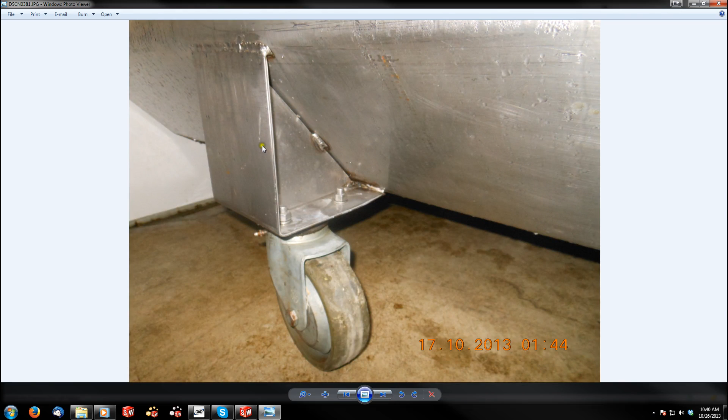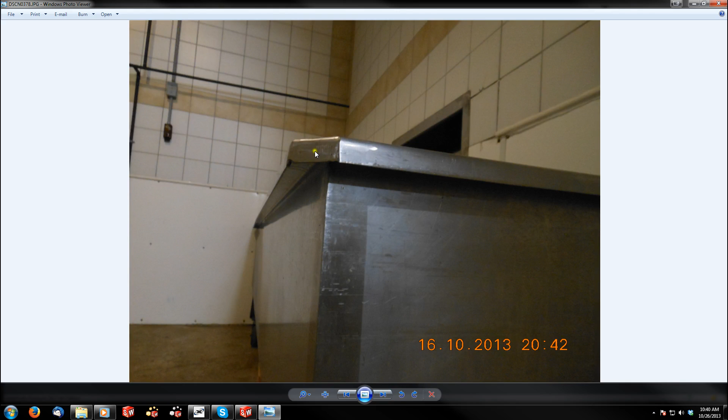This is the chest here. Here's the caster plate. This is specifically what he's looking at me modeling. I'm going to model the entire thing, save for the external details that aren't really necessary to what he's looking for. We'll get to these and I'll show you how to do these. You can do these several different ways, and it all really depends on how the part is going to be manufactured.

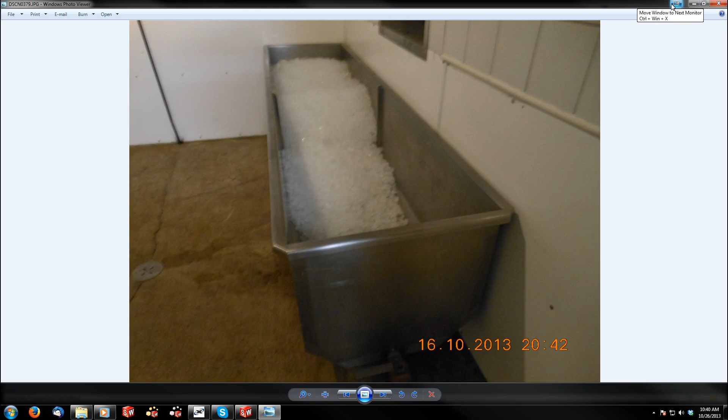I'm going to do it the way I would think it would be manufactured. I could be wrong, and I'm sure Tim will let me know if that's the way it was done or wasn't done, but either way, just like in real life manufacturing, there's 100 different ways to do something in SolidWorks.

So let's start a new part. I also figured I'd model the entire chest too, just to do a brief sheet metal tutorial, since I don't think I've done any sheet metal yet.

Let's start out with I'm already underneath the sheet metal tab, if you can see. So if you don't have that yet, if you don't have a sheet metal tab, you can right click underneath where these tabs are and you can add it. So you can see mine's check marked. I don't have a few other things checked which I'm not using at the moment, so check that.

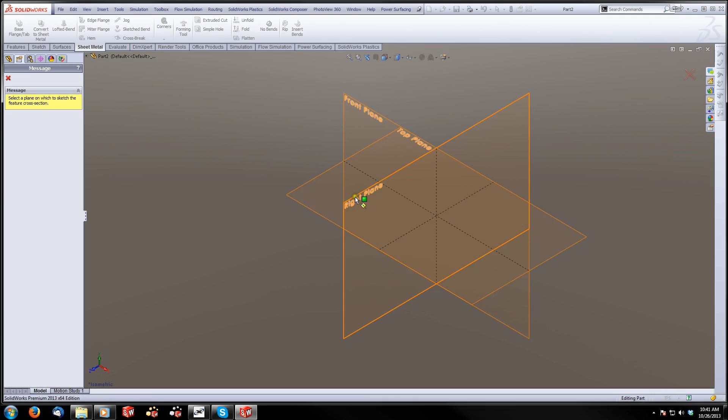Then we're going to go under base flange, which is essentially an extrusion, and I'm going to sketch on the right plane. And then go under your sketch tab and sketch just like you normally would.

I'm going to make this chest 2 feet by 2 feet. And then chamfer the edges. Make them 6 inches.

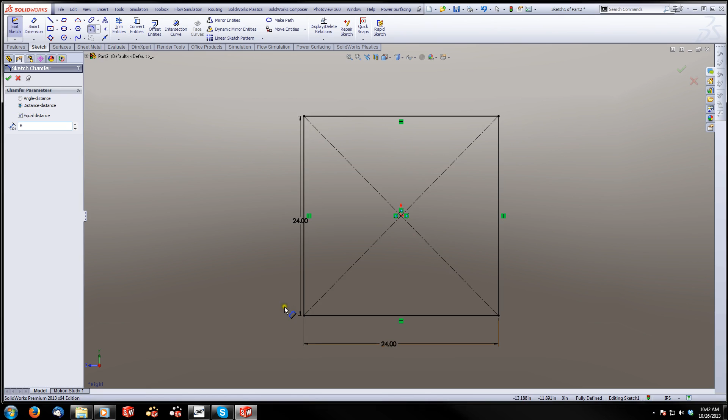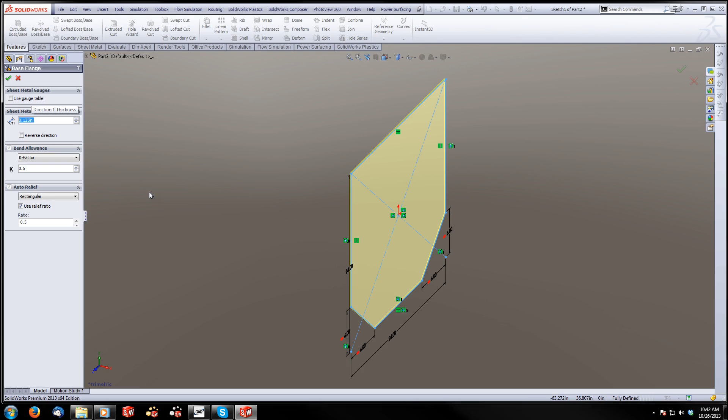Now, I'm just going to update my sketch, and you'll see that it automatically is looking for a wall thickness for the material, and I'm going to do an 1/8 inch. I think in the pictures it does look a little thinner than that, but I'm going to use my best judgment. My company that I work for makes quite a few sheet metal components, and 11 gauge or around 1/8 inch is typically what we use for items like this, so I'm going to go with that.

Now I'm going to create the top flange. Let me bring the pictures back over. This flange, the fold here, and the fold here, I'm going to create on this one part, so it'll be this lip.

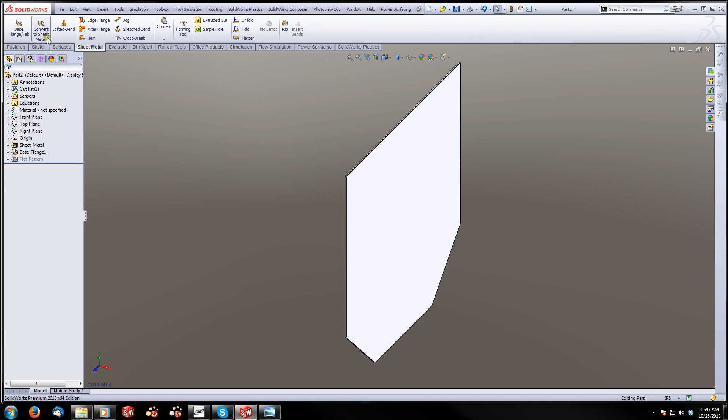And I'm going to do that by starting an edge flange and then just clicking the edge that I want to come off of. I want to go this way with it, and I can define the length of that, which I'll say 1.5 inches.

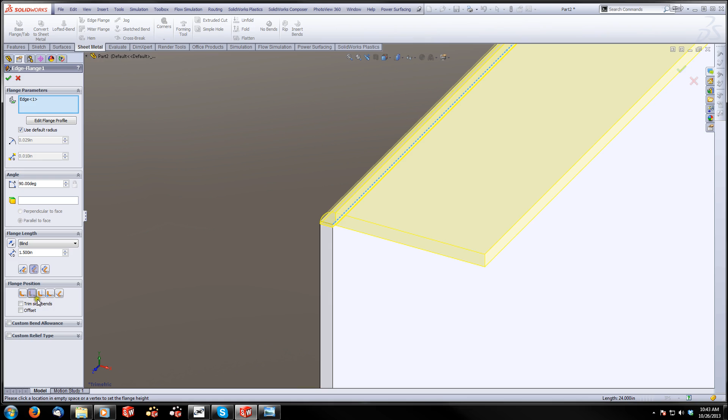And then if you look at the options down here, this is going to dictate how it's bent. So if I know that the top of this piece that I dimensioned is the absolute top of the component, I can tell it to bend below that line. And once I hit OK, it drops the bend down, and this top is maintained at 24 inches.

Now I'm going to do another edge flange on the bottom lip here, and bring that down, and we'll call that 1 inch. Alright, so that's 1 inch, and then I'm also going to keep the bend on the inside of the outer extent of the piece. Hit OK.

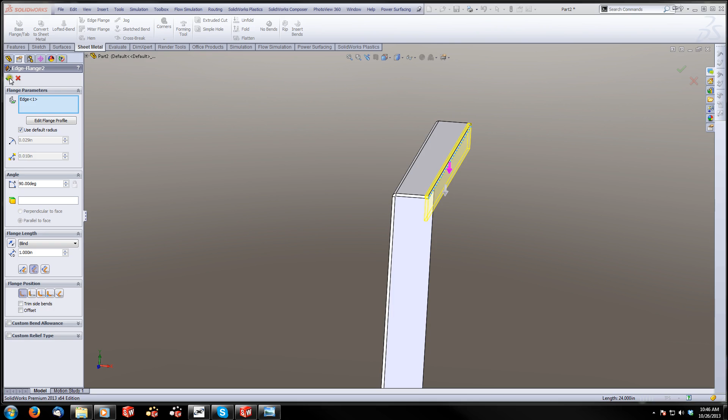And this is one wall of our ice chest. So I'm going to do a file, save, and that's my work folder for my stuff. I'll just make a new thing in here called tutorials.

And part 2 is fine. I was playing around earlier, that's why part 1 - yeah, we'll just make it part 1.

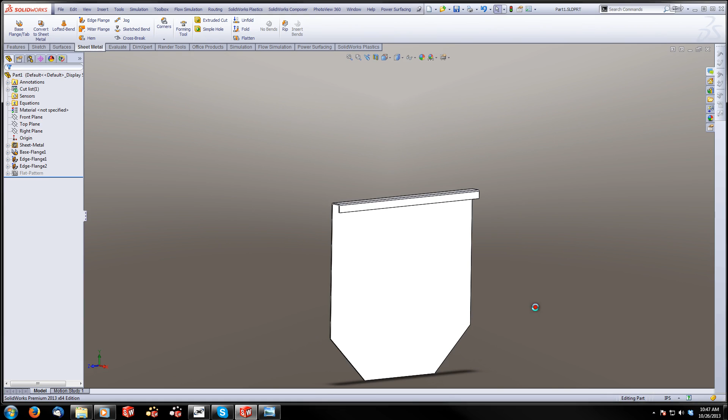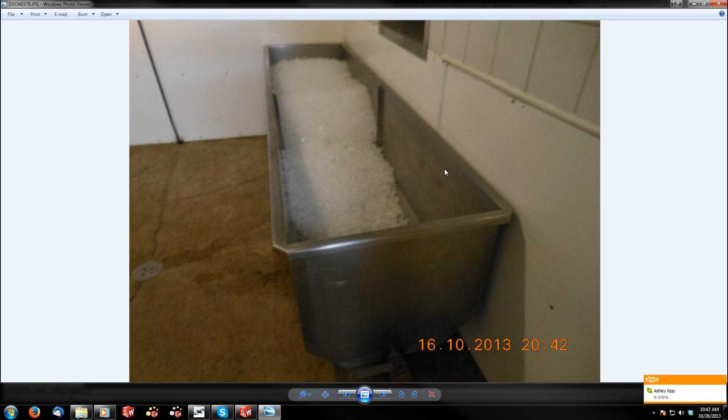Okay, next piece is the side walls here and here, and let's see if I got a better angle of this. Since the profile is more or less rectangular, and by that I mean the surface area, I'm going to draw this entire thing as one piece and then bend it.

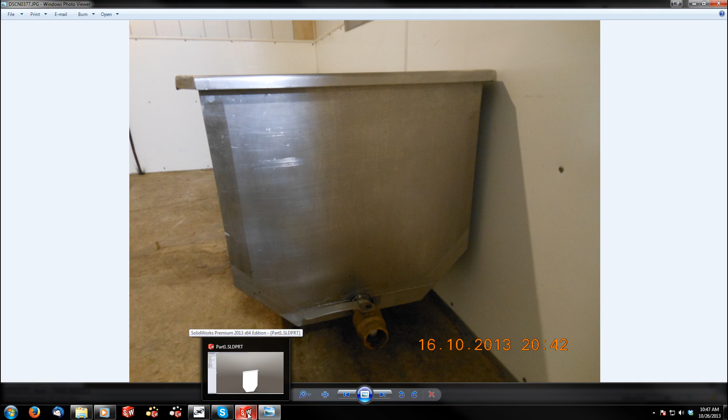So in order to do that, I'm going to start a new file, and I'm actually going to borrow the sketch from this part. Let's take the whole thing, copy it, and paste it into my new part.

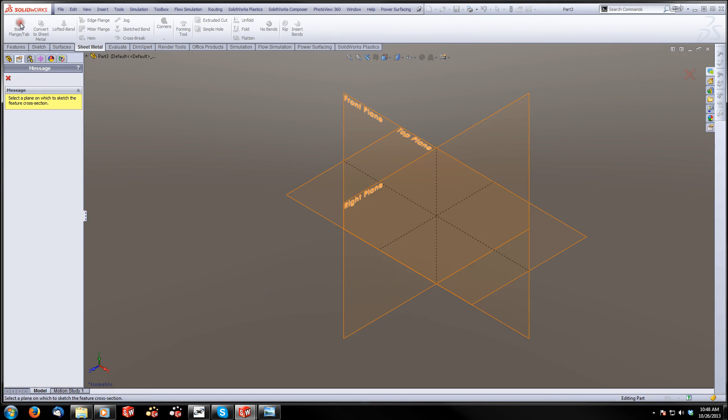Right side, paste it, move it onto the origin here, make it coincident. There we go, now it's fully defined.

This edge I don't need, so I'm going to turn that into construction geometry.

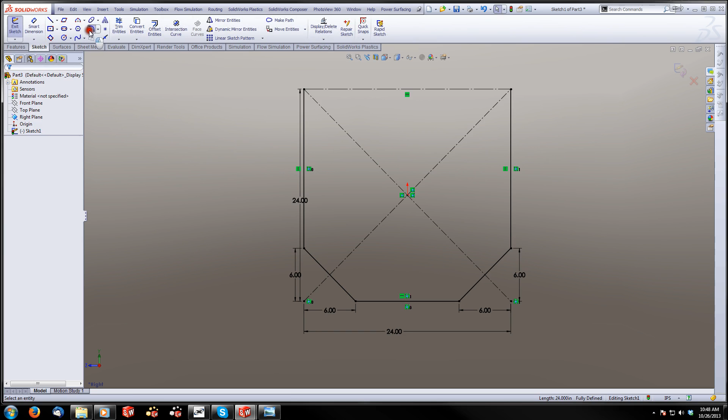I'm going to add some sketch fillets, which are going to be my bend radii. Make them a quarter inch. Might need to go a little bigger than that. Let's do three-eighths. And then hit OK.

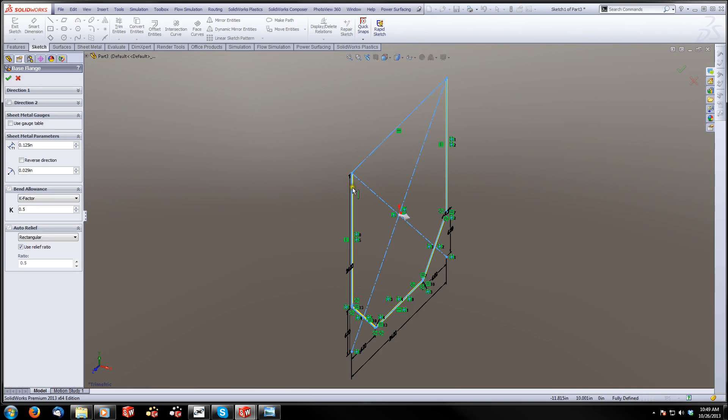Now it sees that entire sketch profile as a formed sheet metal part, so I have to define my wall thickness, which is good, and then I just want to make sure it's actually going in the correct direction, which it is.

So then at that point I tell it how far I want to go, which let's do 6 feet, and we'll make it mid-plane.

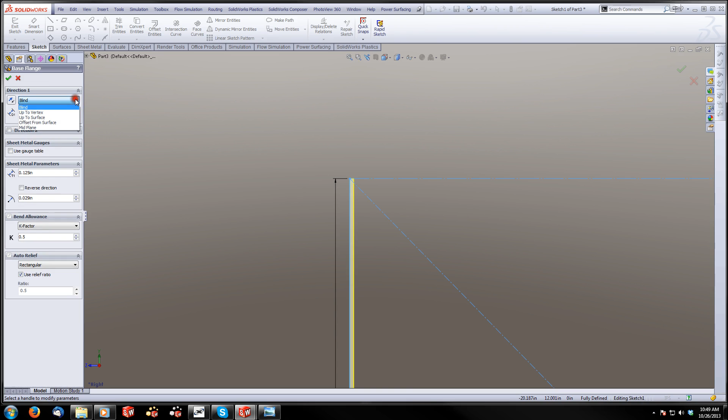Looks good. Now we're going to do our flanges again. For this I can actually click this edge flange, drag it out, click this edge flange, drag it out. It'll be the same size. We did 1.5 inches before, so we'll do 1.5 inches again.

Make sure it's below. Yep, good. Click OK.

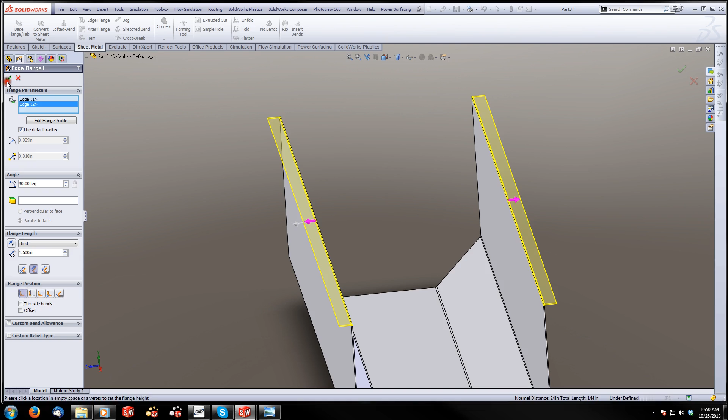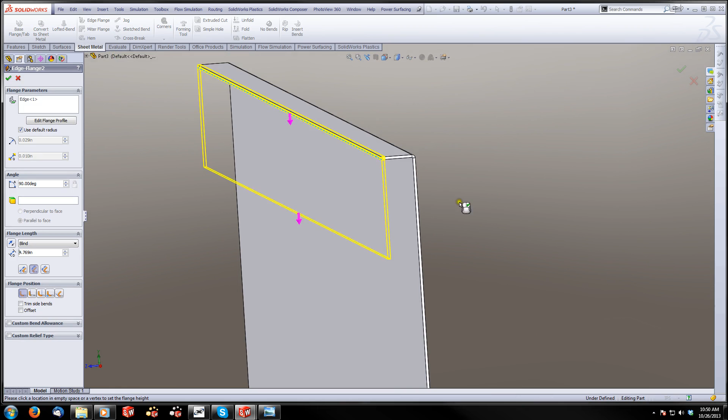Now I'm going to add another edge flange to this edge. My mouse is tweaking out. There we go. One inch, inside.

Okay, now we're going to save this.

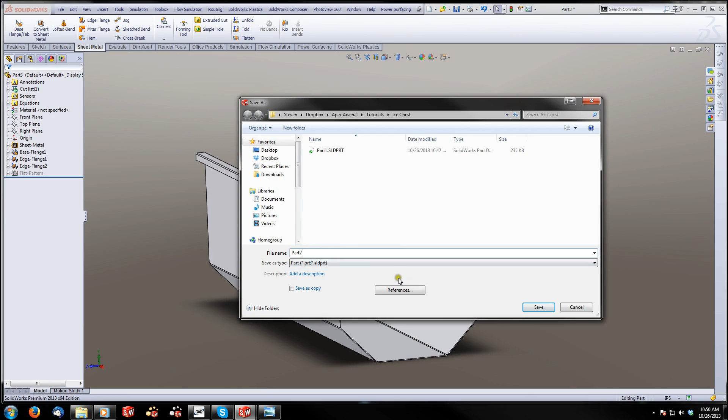Now we're going to make an assembly from this part. And I think I mentioned in my assembly video, if I want the origin of this part to be shared with the new assembly I'm making, once my assembly window is open and parts selected that I want to drag in, I'm just going to hit the check mark. And it automatically centers and locates this to share the assembly origin with the piece origin.

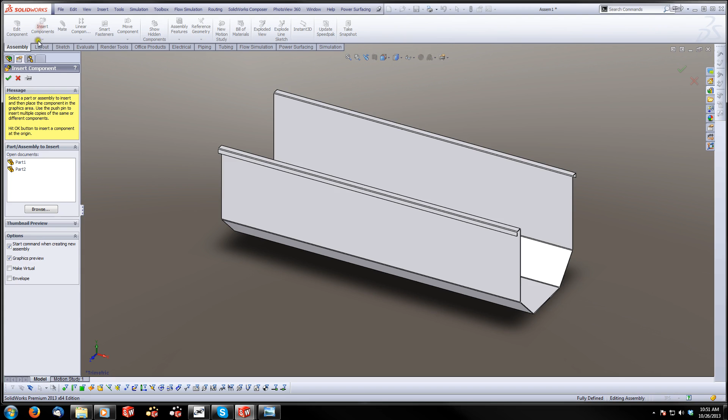Now I need 2 of part 1. So I'm going to place that one, hold control down, grab part 1 and drag off of it. That'll give me a second one. And then I can mate those up.

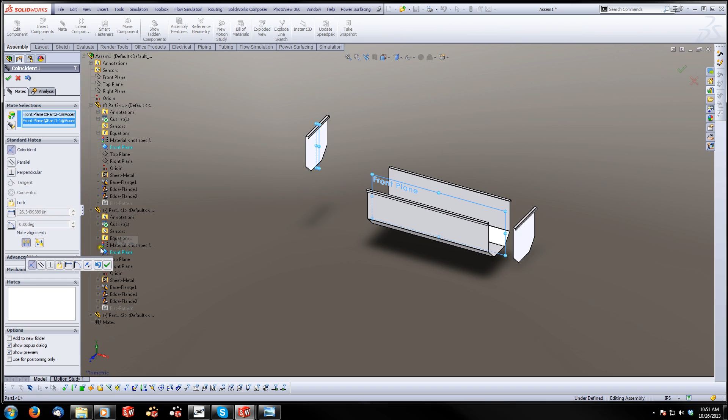And I can actually use my datum planes to mate those now, since I located this piece central to the origin. So I can do front plane, flip it. That's good. And then do this surface and the edge surface of this.

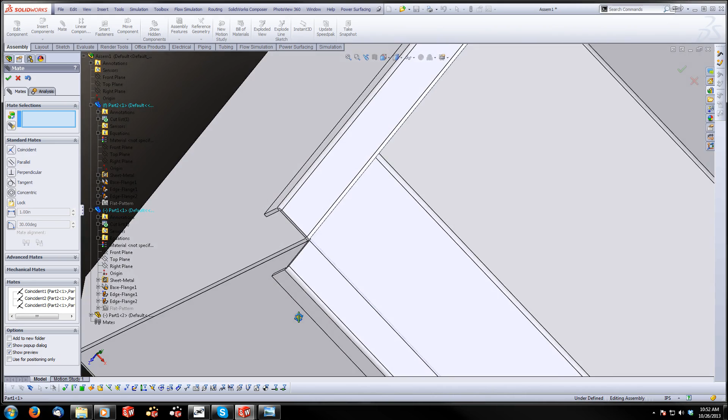Good. Top of this flange and top of this flange. So now those pieces are butted up, and realistically I should have gone oversized with this piece so that way you could get a good fillet weld in between the 2 grooves of these, but this will work too. A butt weld is also common, so it's not a big deal.

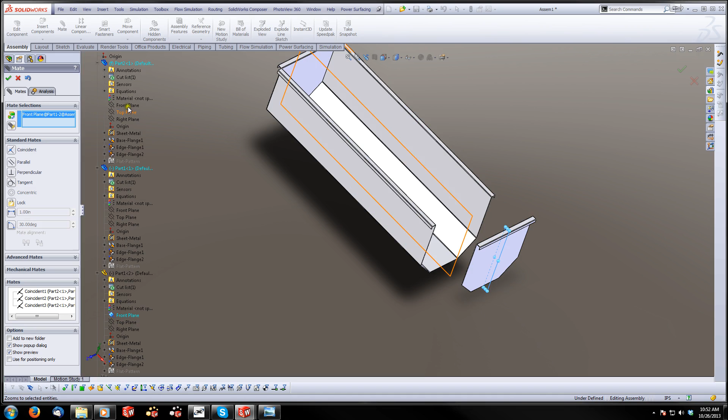Now we're going to mate the other piece, other side. Top of the flanges.

Okay, so now you'll notice one key thing I'm missing here is the corner piece. And I'm going to show you why I skipped that initially and how we're going to actually add that in.

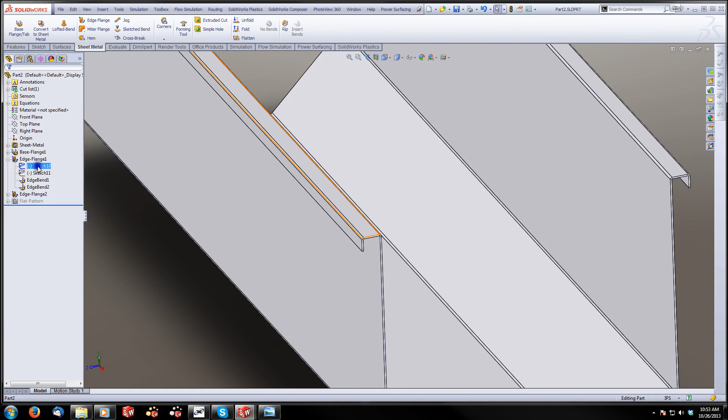So we'll go back in here, and when you create edge flanges, you're actually creating a sketch that SolidWorks sees to drive this. So what you can do is you can open up your edge flange feature and edit the sketches that make that piece.

So now what I'm going to do is I'm actually going to modify the flange to look like this. Make these 2 lines equal. Oops, we want to define this first, otherwise our sketch is going to move. So we're going to make these equal.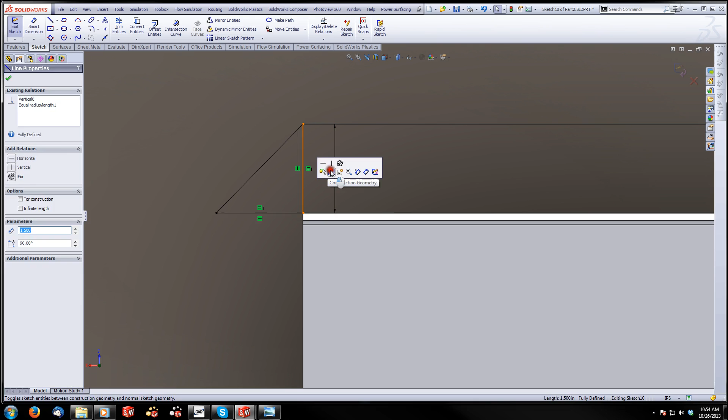I'm going to make this a construction line now, and do the same thing over here. Make them equal, and make this one a construction line.

Save it. No, I think I broke it. Might not want to do that for me. Okay, let's change this a little bit.

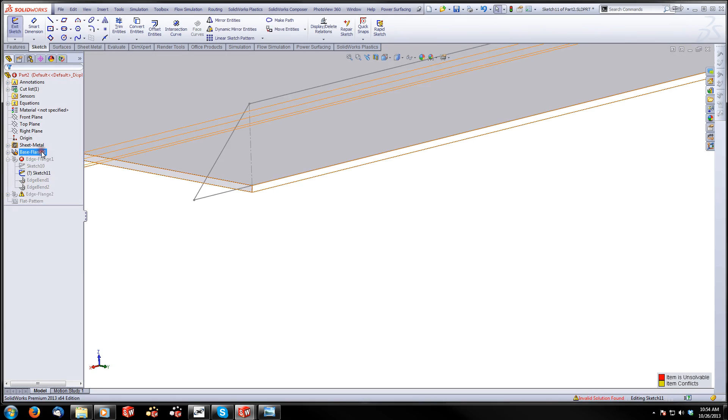I think due to the fact that this is coming off of this edge here, it doesn't exactly know what to do with this. So what I'm going to do is...

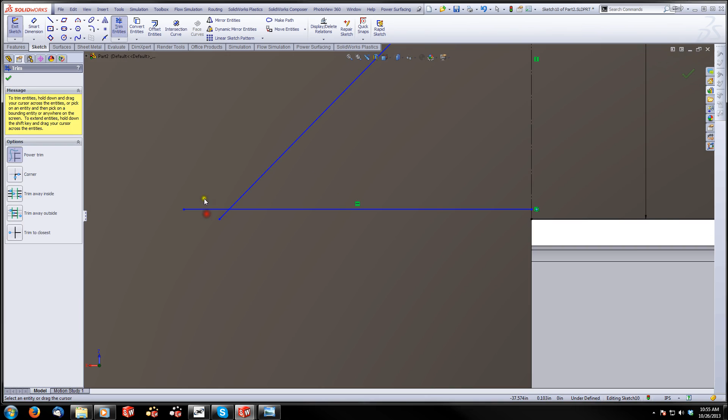I guess we'll trim it off, and I'm going to come up a little bit off of my edge there, trim this, and create a solid line that's connecting those. And we'll make this 1/64 of an inch, so you'll barely see it.

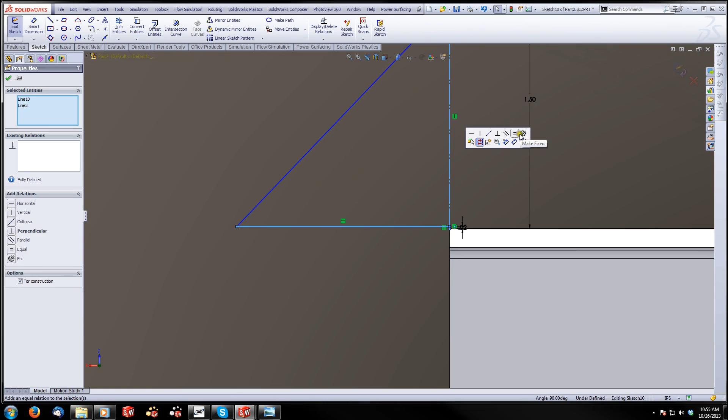And still make this equal to the overall length of this. And I'll actually trim this off and just mirror that one over the center.

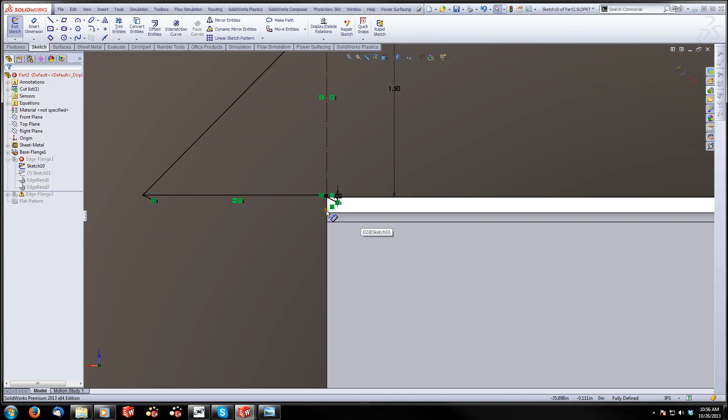I think it's having issues with the bend radius, so maybe I need to make this at least half the bend radius.

Sketch contains a zero length entity. Let's just undo all of this.

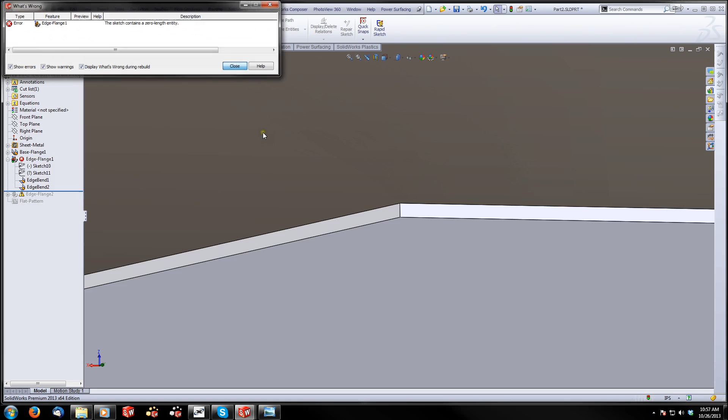Kind of curious as to why that's not working out for me. But that's fine, we can actually do it a different way.

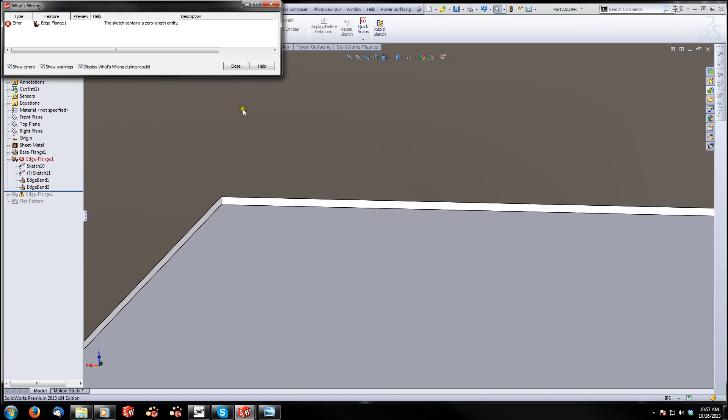It's still busted. Unless it's this. I don't know what this is.

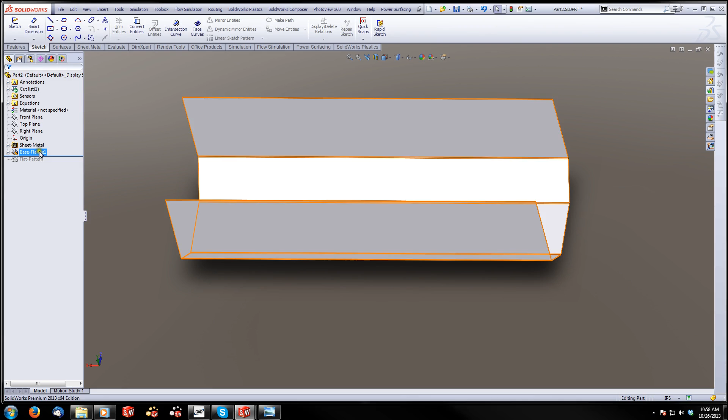Well, since I broke these, I'm just going to rebuild them and do this a different way.

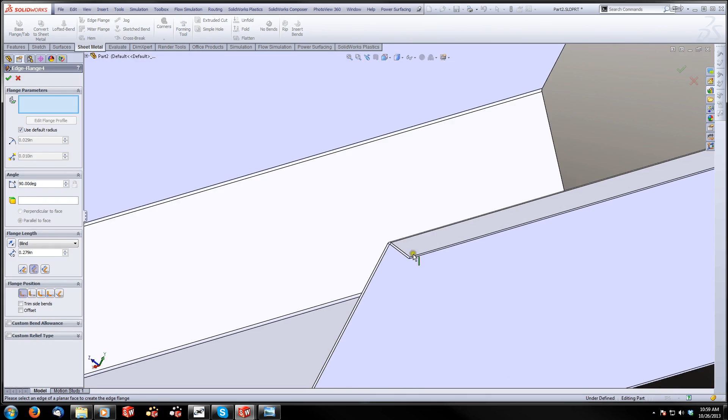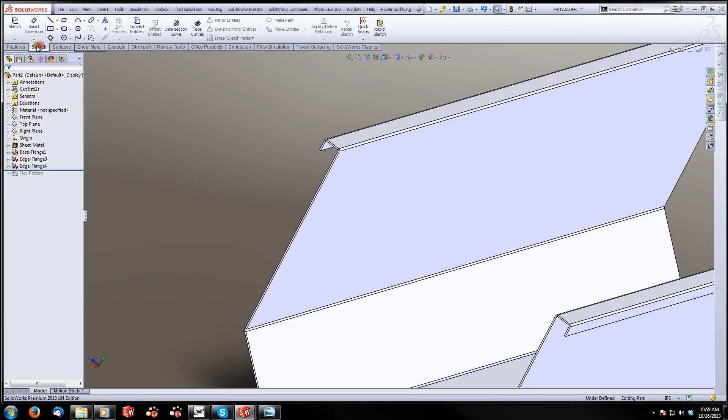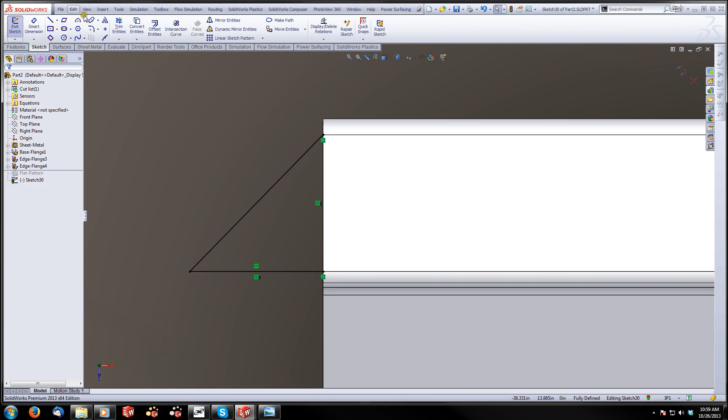Okay, now what I want to do is sketch on the top surface here. I'm essentially going to do exactly what I did before with the flange, except I'm just going to make them separate pieces.

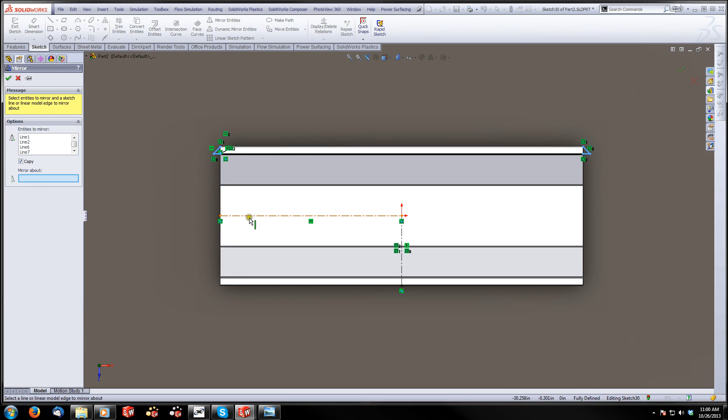Okay, now features, extrude. I think I have thicken enabled. Yeah, I do, I don't know why. Oh, duh, these are not closed sketches.

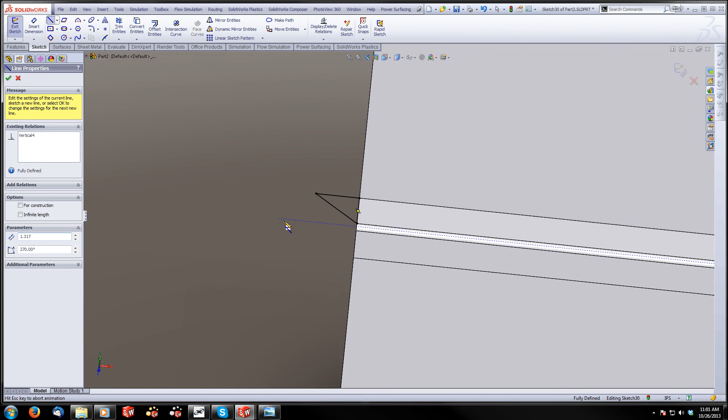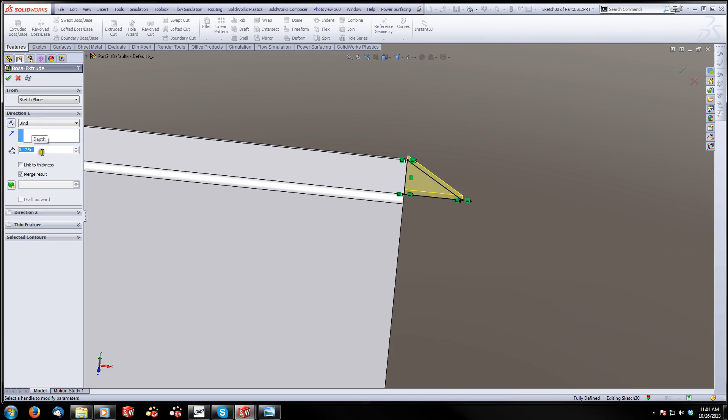Okay, now they're closed sketches. Now I'm going to go features, extrude, 1/8 inch in the opposite direction. Now those triangles have become part of that flange, so if I do a flat pattern, you'll see that those are included in that flange.

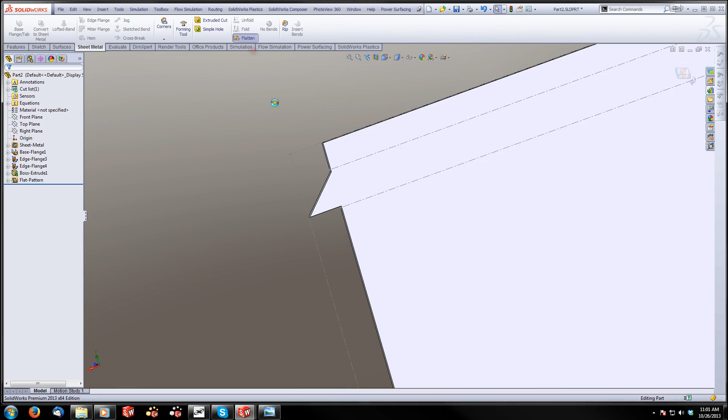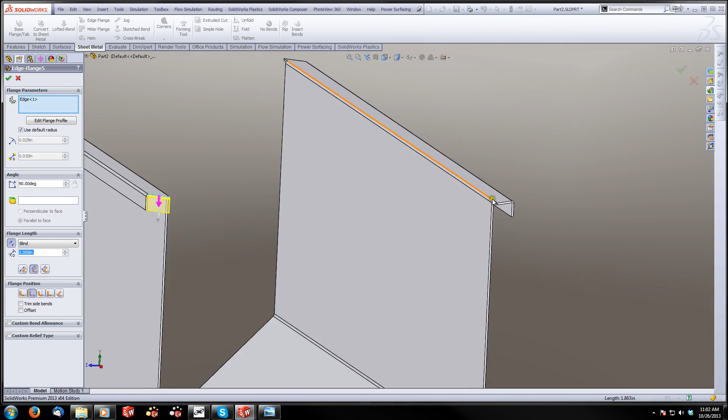It's exactly what we want. Now I'm going to add another edge flange here, and this is going to be outside, and it'll be 1 inch long. I'm going to do that to... which edge did I select? Yep. All 4 of these.

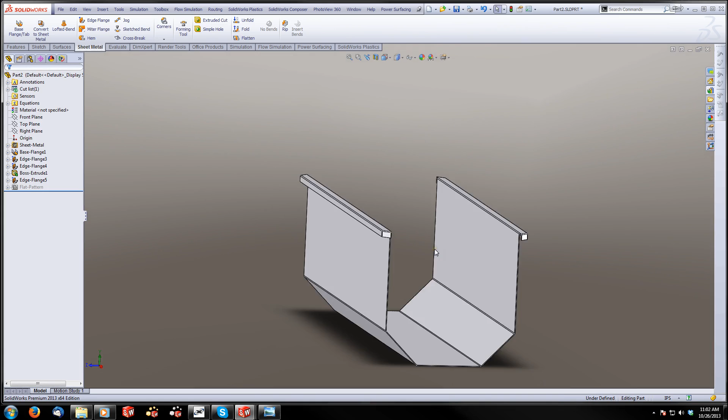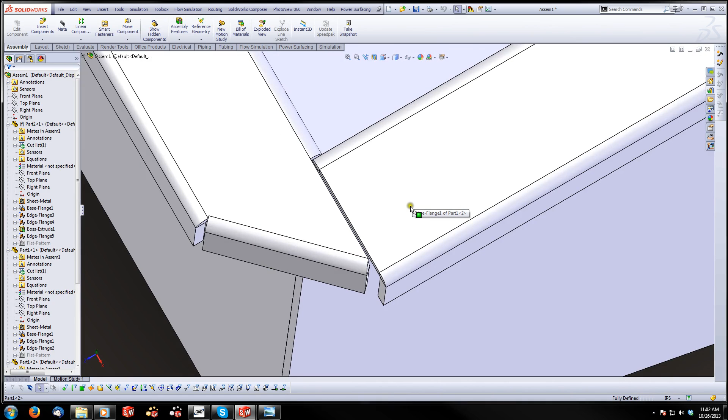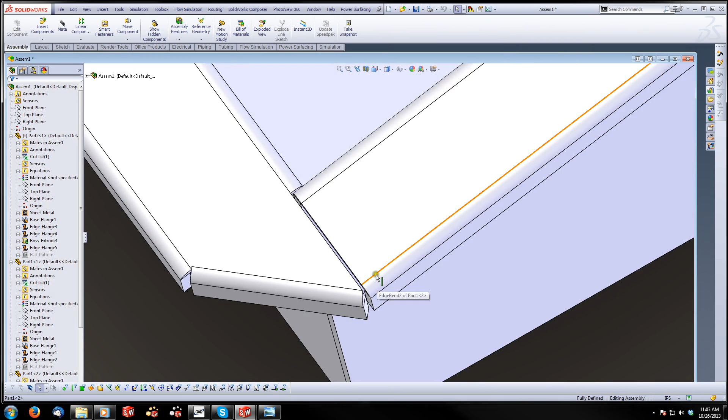So now if we go and save this, go back into our assembly - not quite right. Oh yeah, because I don't have a butt weld there. So what I can do to remedy that, oh, and actually I think maybe we'll do it this way. We'll open up this piece and we'll change this edge flange to 1 1/4. There we go. Now those made up properly.

So there's our trunk, our ice trunk, or chest rather. And the next step is to create the mounting plates for the casters. We can do this in a number of ways. I'm going to create an L-shaped sheet metal part with a rib and then assemble it to the chest.

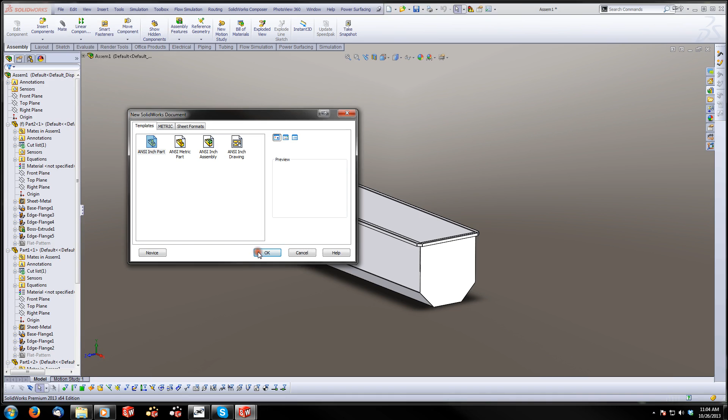So let's go back into SolidWorks, and let me bring this drawing up and put it over here so I can see what I'm doing. File, new, base flange, right side. Now I'm just going to draw an L.

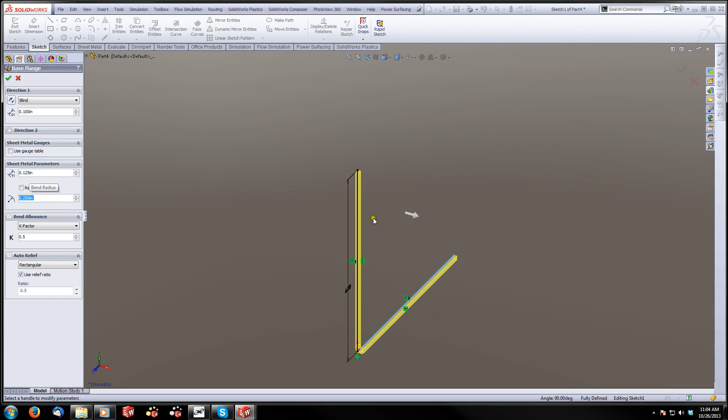And I know my length is 6 inches. Make these equal. Okay, bend radius is going to be, let's do 1/4 inch. Are we bending to the outside or inside? Let's go inside. There we go. We'll make them square, so we'll do another 6 inches mid-plane.

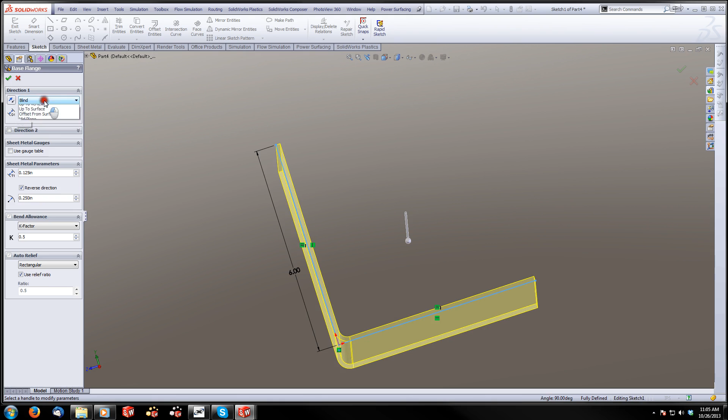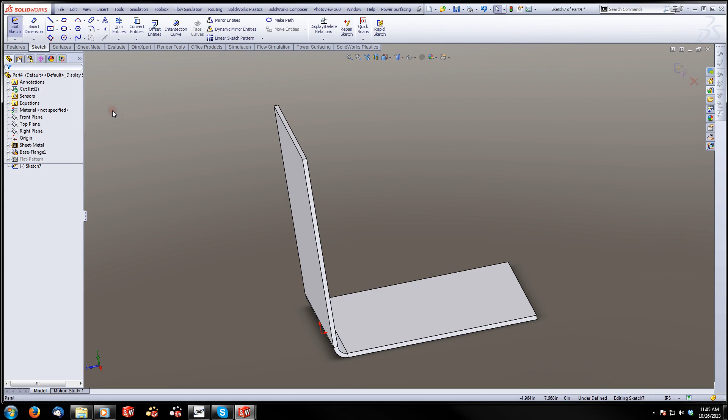And now I'm going to add a rib, and a rib just needs a singular line sketch. So we'll do front plane - oops, no, right plane. Right plane. And I'm going to connect from here to here. Finish my sketch. Go to features, rib.

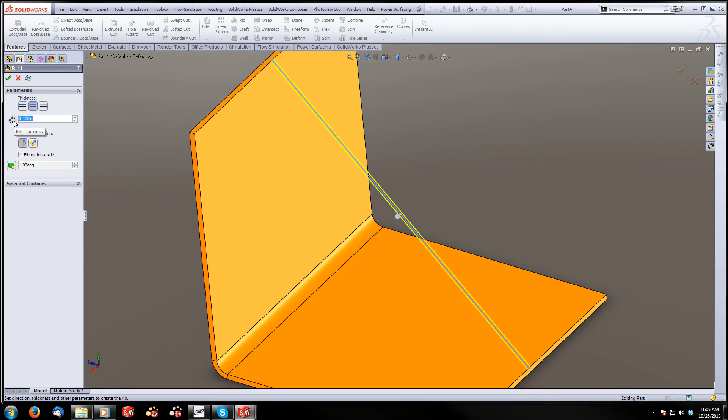And the direction the rib is pointing, or the arrow is pointing, is the direction the rib is going to connect to the material. So I'm going to do a material thickness of 0.125, hit OK, and there's our rib. And then I can add the holes for our caster with the hole wizard.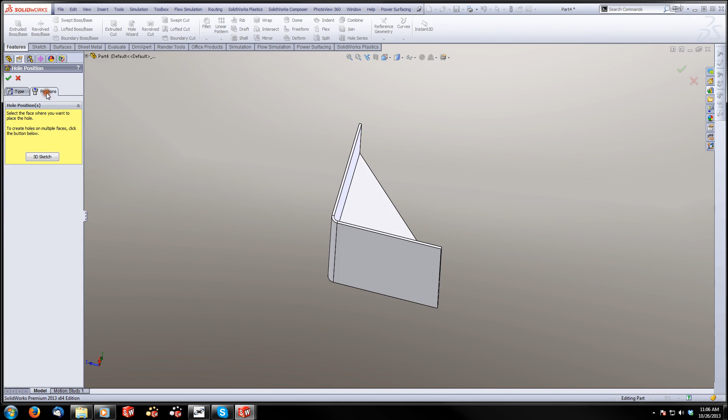And let's do ANSI inch through holes for screw clearances, do a... oh here we want screw clearances, there we go, 3/8. This is just a guess, just so everyone knows. Up to next, positions, bottom of the flange. 1, 2, 3, 4.

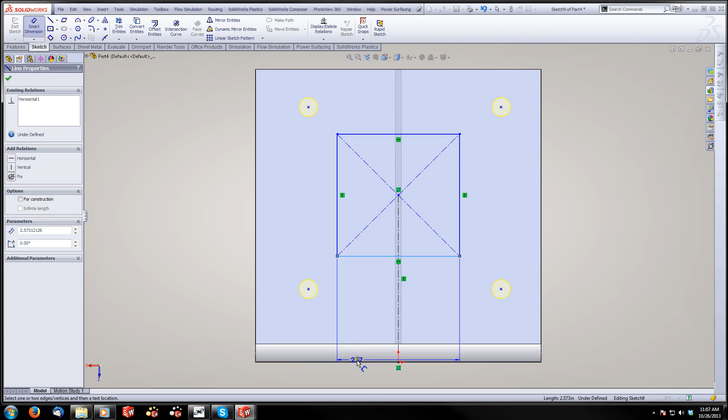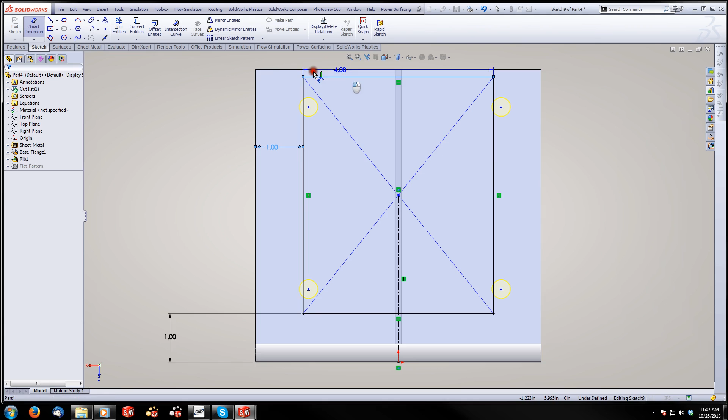Let's do 1 inch. The 1 inch. Okay, now I want this square is just for reference geometry, so I just want that to be construction lines. I'm going to fix my holes to each corner. Hit OK. Alright, so there's our flange.

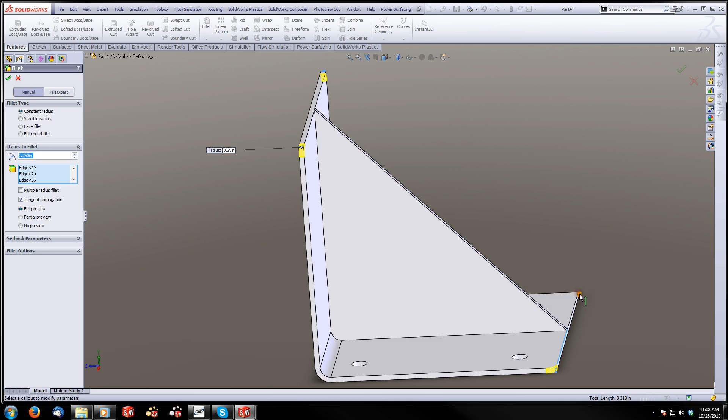Now, just because I like detail, I'm going to add some fillets. Alright, save it.

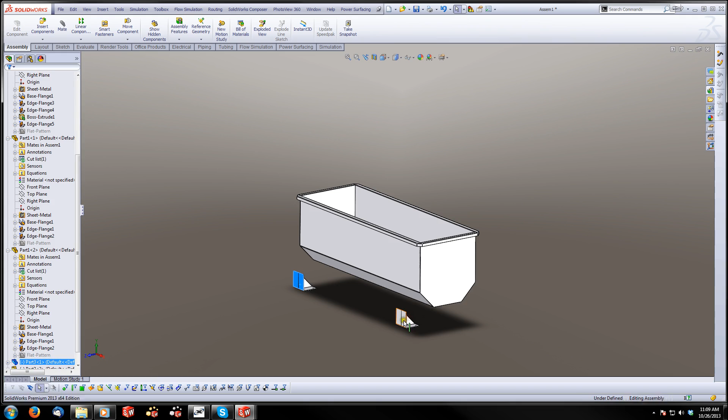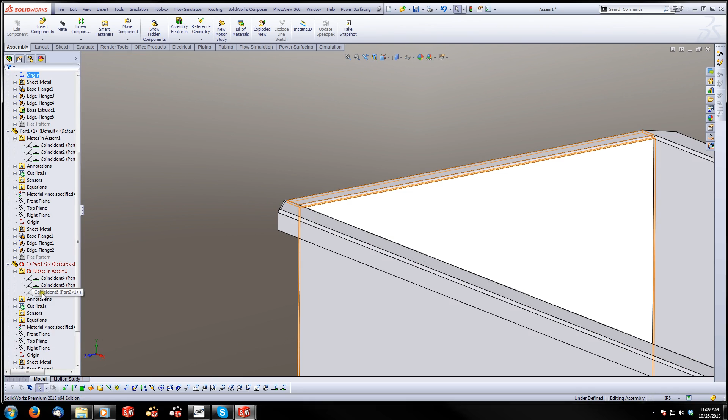Now go back into my assembly. 1, 2 - actually, we only need 2. I'll show you a trick. We're going to mate these. Uh-oh, what's the problem here? That's from when I deleted those flanges earlier. It sees them as missing now, so I just got to reselect them. There we go.

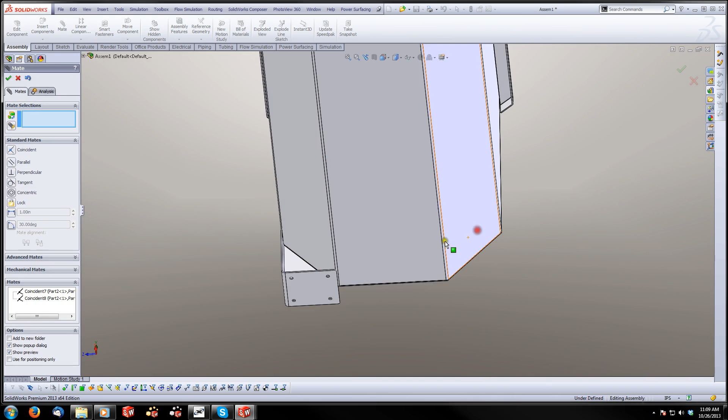Okay, so mate this flush with this, and this flush with this. And then we'll go over here and we'll do a distance mate on these. Let's make that 6 inches in the opposite direction. And then same procedure on this one.

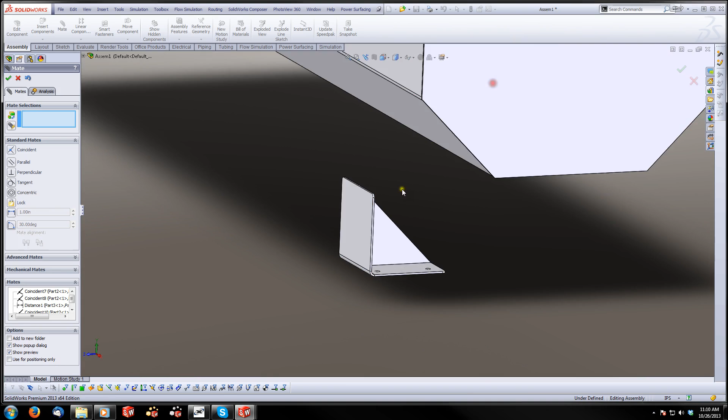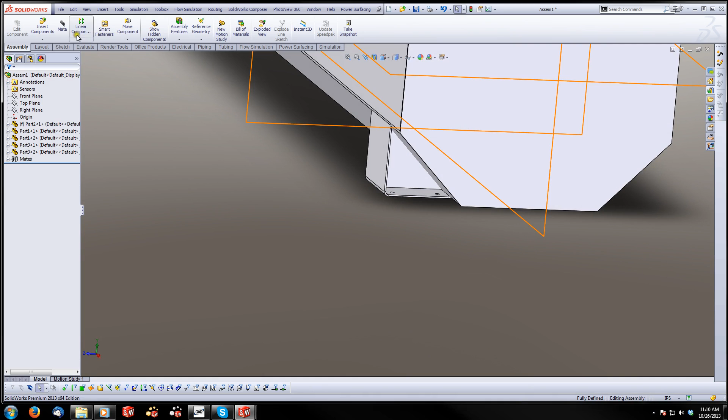Okay, next, going to do a mirror over the front plane, and that's going to be these 2 items. Hit OK. There we go.

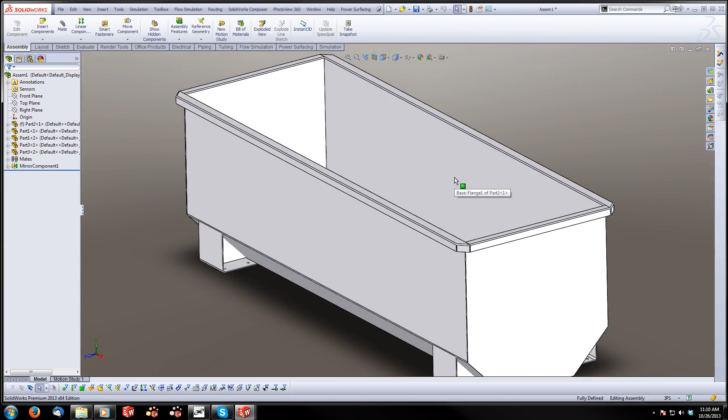And that is our finished ice trough. That's how I would go about modeling it. I hope this answers Tim's questions, and I hope it was educational, everybody. Have a good one.